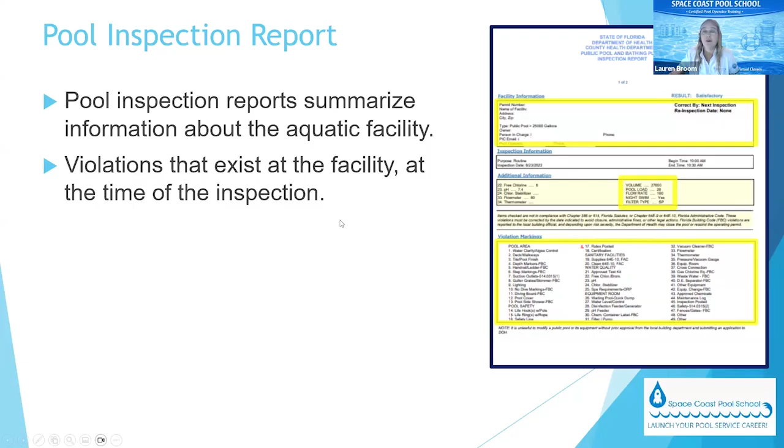So violations that exist at the facility at the time of the inspection are written down here in the violation marking section. And the local health agency will not advise on correction of violations. It is the responsibility of the facility's pool operator. And communication with the local health agency is a very important step in the correction of your violations.

So this is the very top. We blew it up for you, the top of the inspection report that you get from your health inspector here in Florida. And as we indicated, on the top is where you're going to have your permit number, the name of the facility, and the address, and all the identifying information. In the blue box, it gives you the type of facility, gives you the owner, person in charge, their email and contact info, and your pool operator.

And then the green box is the inspection information, gives you the purpose, inspection date, and it gives you the begin and end time of the inspection when the inspector was there. Down below that, you have the additional information box in that yellow box. This is where the inspector is going to put the things that they checked on their inspection. So they should have a test kit and they're testing your free chlorine, your pH, your chlorine stabilizer, also known as cyanuric acid.

They're looking at your flow meter for the flow rate in the equipment area and writing that down in gallons per minute. And if it's a heated facility, they should be checking the thermometer. There has to be an inline thermometer in the return line, and they're writing that temperature there. And then again, the blue box is the same information that's on your pool permit as well.

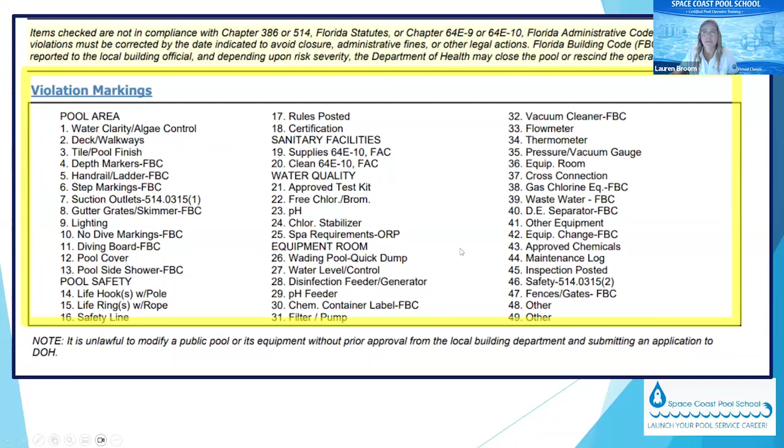Okay. General comments could be if you had a perfect satisfactory inspection, they have to write something. They're going to write something like no violations noted during this inspection. That's their legal way of saying while they were there, they found no violations. Doesn't mean there weren't any before or after they left. Doesn't mean that they didn't miss anything either, because they're human beings. People miss things sometimes, and they might see it on the next inspection. So be aware that can happen.

An inspector can close a spa and still keep your pool open. They're written on different inspection reports. So one could be satisfactory and the other one could be closed. They're separate entities from each other. So different permit numbers, different who it's issued to, could be different ownership on there. The owner is indicated on there.

Violations number 2 and 3 are physical hazards that are under the Department of Health code. These could be things like an unsafe wet deck, sharp edges or broken tile in the pool, or a hazardous pool finish. This is up on a gutter edge where the tile kind of broke and there are some sharp edges on it. So somebody that puts their hand there could cut their hand on that. That can be a closure item. Okay.

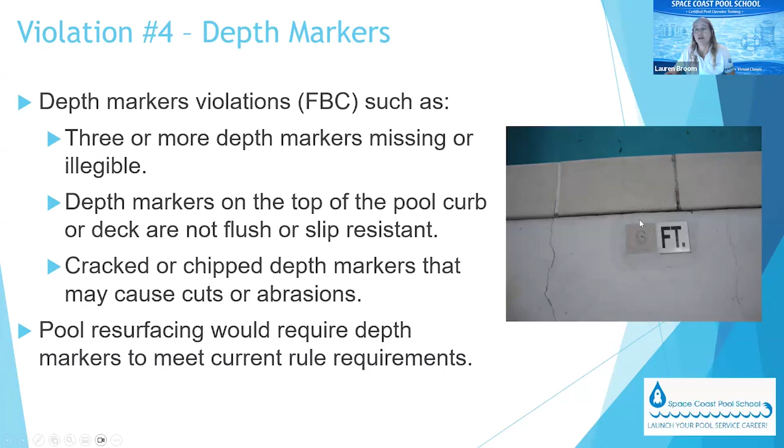So this is an example of a depth marker that basically is not legible anymore. You can kind of tell it's a 6, but it needs to be clear. It looks like the tile might have come off or something like that. So pay attention to the inner tile edge where the depth markers are and on the curb.

Violation number 5, handrail and ladder. These are Florida Building Code violations. Examples for closure would be missing, inoperative, or loose ladders that are a safety hazard, and same with the handrail. Missing bumper guards on the pool ladder feet. Missing escutcheon plates that cause exposed bolts up on the deck or with the handrail in the bottom step. Missing slip-resistant step treads on your pool ladder, missing steps on the pool ladder, or a pool ladder that is not flush with the pool wall. And again, ladders and handrails have to be addressed with pool resurfacing.

All right, so this is a handrail. It's the same pool that had the surface issue. This pool had another problem. That handrail could be lifted right out of the pool deck, guys. So that's an issue. That would be a closure item. Big safety issue.

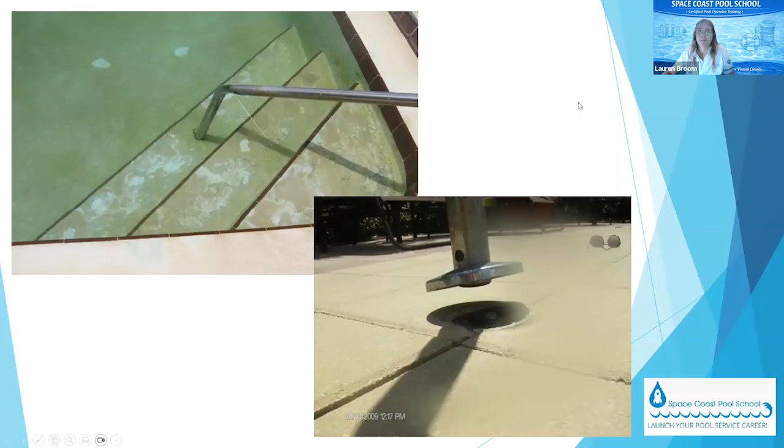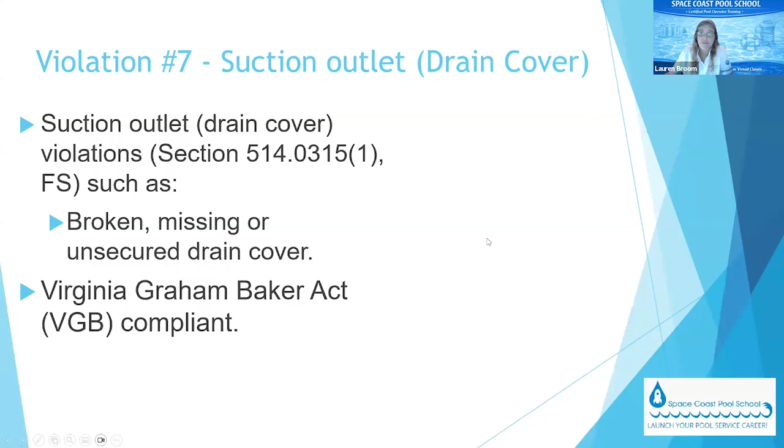Violation number 8 is your gutter grates and skimmer violations. So any injury hazard on any exposed broken gutter grate, or a missing skimmer cover on the pool deck. So that's up on the pool deck itself. You're missing the skimmer cover. If somebody's not paying attention where they're walking, they could break their ankle, anything like that. And if you're missing your skimmer equalizer line cover or plug.

Oh, this is always a hot topic one. Violation number 9, lighting. So first, let's look at different lighting violations. Loose underwater lights from the pool wall, that's a closure. Any electrical code violations with lighting. And then if you have pool hours on your pool rule sign that state night swimming hours, but the pool has not been approved for night swimming with a lighting certification.

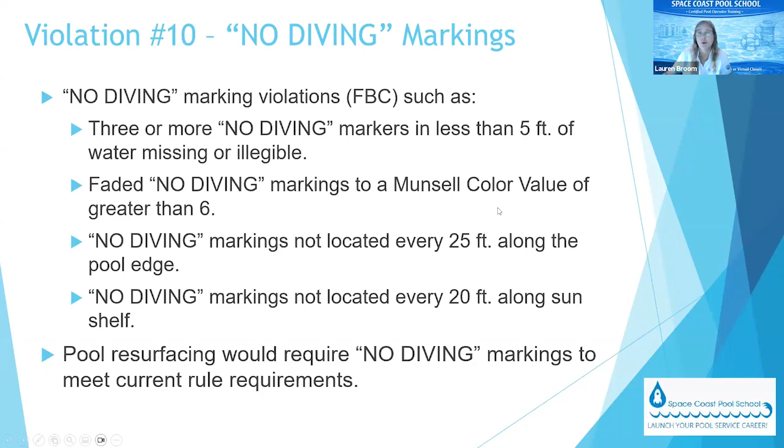Violation number 11, we don't see this one written up a lot because we don't have a lot of public pools that are approved with diving boards. But diving board violations are FBC, Florida Building Code, and examples would be if the rail is missing for a board 1 meter or higher over the deck, if the diving board is broken, or the diving board is not secured to the deck properly. So it's some common sense stuff. If it's loose, broken, damaged, anything like that, it's going to probably be a closure item for that pool.

Pool covers, violation number 12 for closure. Pool cover violations are under the Department of Health Code. If the pool cover is in use when the pool area is open, it has to be able to support a live adult person. So those floating bubble covers are not meant for that. Somebody falls into it, it can wrap up around them. They can't get out of it. They're going to drown, especially kids too.

So if you have the pool cover on, you should have your pool locked up because you don't want anybody even in the deck area. All right. So it's those floating covers that we're worried about. And then if you have it on a roll and you've taken it off, you've got to back it off 4 feet from the pool water edge before you open the pool.

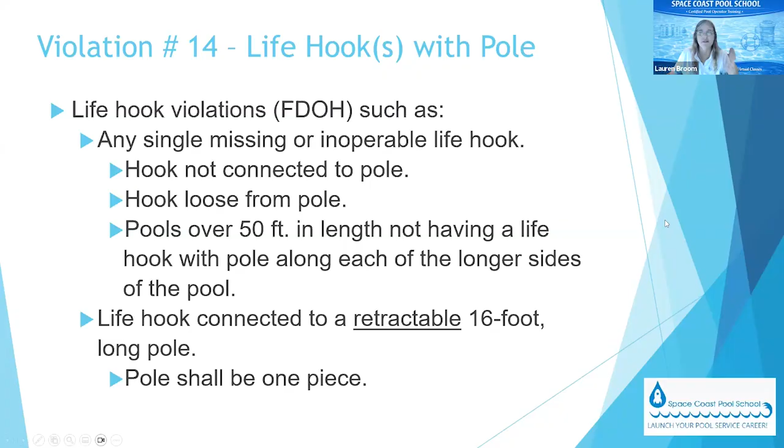And the life hook cannot be connected to a retractable pole; it needs a 16-foot long pole. The pole has to be one single piece. So it can't be retractable like some of those are when you have your skimmers and stuff like that. All right. One single 16-foot long pole. Always check the bolts and wing nuts too. Make sure that they're on this side of the pole and the wing nuts are on the other side, and that they're both there and they're not rusting through and loose and stuff like that.

Make sure it's on that 16-foot single length pole and that the life hook is conspicuous as well and that it's not being blocked by tables and chairs and stuff like that. You can get written up for that as well.

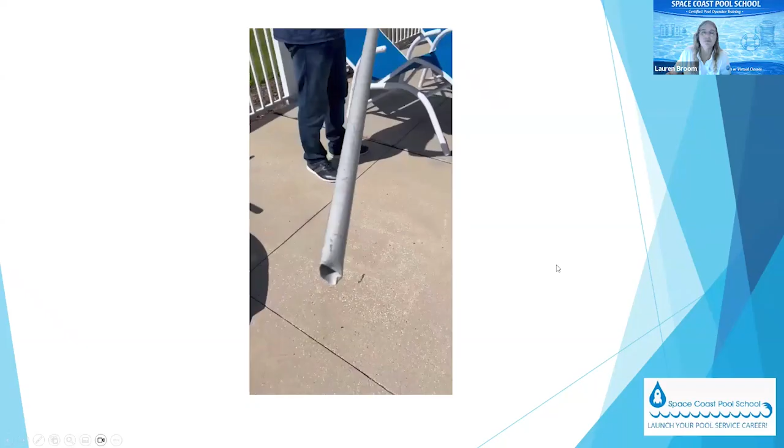So I think the maintenance guys at the hotel where we were teaching the class went ahead and tried to make their own 16-foot long pole. Can't do that. All right.

What about violation number 15, life ring or rings with the rope? This is a Department of Health violation. And so any single missing or inoperable life ring with rope would close the pool. And again, pools 50 feet or greater in length have to have 2 life rings along with 2 life hooks on both of the longer sides of the pool. Otherwise, it can be closed.

If you have frayed or dry rotted rope on the life ring, they could close it. If the rope's not tied to the life ring, if the life ring does not have sufficient length of rope to reach all parts of the pool, they could close it. If the life ring is not 18-inch in diameter, and you can't use decorative life rings either.

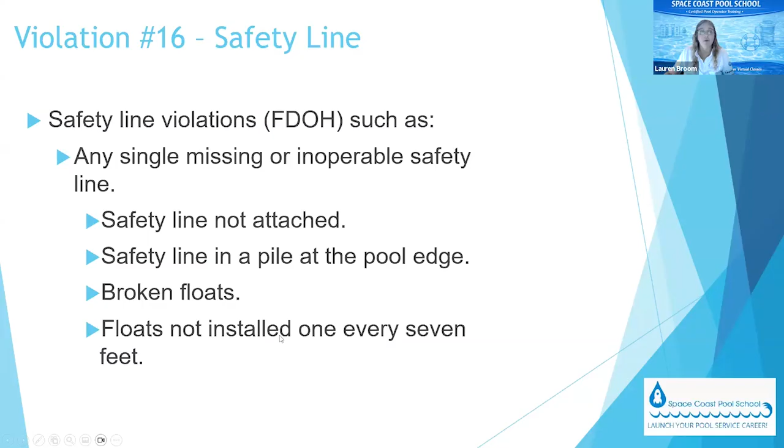Sanitary facilities. What do we mean by that? That's bathrooms, right? Sanitary facilities, which are our bathrooms, are Department of Health violations. So if we had poop on the floor, toilets aren't working, poolside bathrooms are not accessible, meaning they're locked. A lot of properties will do that. They will lock them on the weekends. Well, they can't do that. They have to be open.

Get a key fob or a key or something that the people living in the community are going to have. You can lock it, but then they have a key that they bring with them to access the bathrooms. Make sure the health inspector knows that that's what you're doing. They can put that in their general comments so that they know they probably need to ask you for a key to access the bathrooms to inspect them, because it is part of their inspection.

Hurricane damage. If a hurricane comes through and damages, say, your clubhouse, we had this happen in 2004 when I worked with the Department of Health, and the clubhouses were down and they had no poolside bathrooms, but the pool was fine. People really wanted to go swimming in their properties, especially the 55 plus manufactured home communities. So we let them get portable toilets under a different administrative code under the health department.

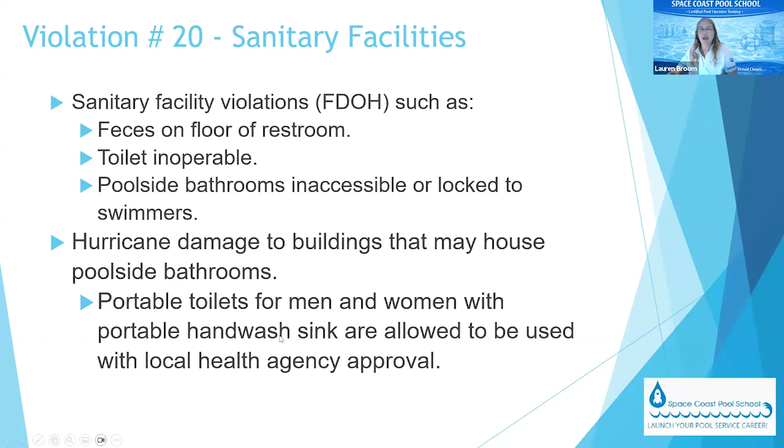And I think it was like 6 months they're allowed to have it, as long as they pump them out and they don't become a sanitary nuisance. They have to have 2 though, one for men, one for women. And you have to have a portable hand wash sink that's separate from the portable toilets. And you have to keep it stocked with the single paper towels, and water and the whole 9 yards. All right.

So bathrooms can be inspected by the health department. They can be right off the pool deck, or they could be part of the clubhouse, but they're still going to be within the distance required by the health code. And they're looking at making sure you have hand wash supplies, so soap, disposable paper towels, or a hand dryer, someplace to put trash in properly.

Some of the newer bathrooms have to have floor drains and diaper changing stations. And they're making sure that you have the number of toilets required and all that good stuff based on when the pool was built. Older pools are going to have fewer toilets. They've increased the toilet count in the code as we got into more modern times. So they're going to be checking all that stuff in the bathroom as well. Some people are surprised that they're checking the poolside bathrooms, but it is part of the inspection. Okay.

Chlorine levels in the pool. This is definitely for disinfection and is going to close the pool. So I want to go over this really quick. Swimming pools have to be maintained between 1 and 10. If you have a splash pad or anything like that, it's 2 to 10. If you have a spa or hot tub on your property, it's not 2 to 10 anymore, guys. It's 2 to 5. They dropped that upper level on spas from 10 to 5. That's a really hard level for chlorine to maintain. So I'd be interested in knowing how many spas across the state have gotten closed, not staying between 2 and 5, since they changed that in 2023.

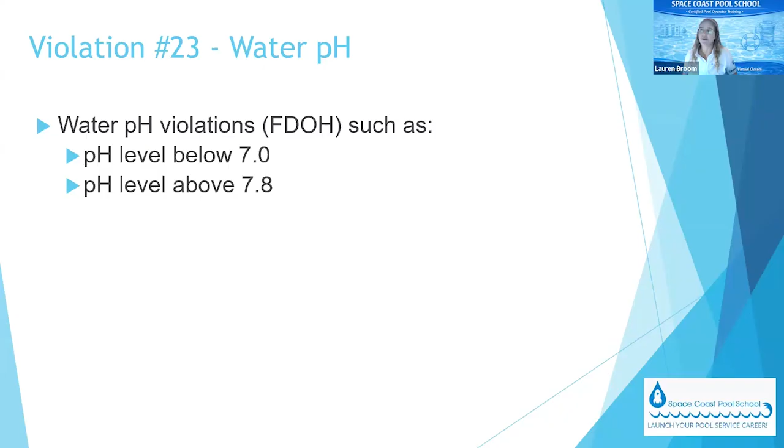And then we get into pH level. They did update and change the pH level in 2023. Before June 20th, I think, of 2023, it was 7.2 to 7.8. They lowered it to 7. So now the closure happens when it's below 7 or above 7.8. So as long as it's between 7 and 7.8, you're good.

And then we get into your disinfection equipment. You have to have an automatic chlorinator or disinfection feeder working on the pool, hot tub or whatever facility you have. You cannot have it open if you do not have a chlorine feeder or some type of disinfection feeding equipment that is actually feeding the chlorine or disinfectant for you. Hand feeding chemicals into a pool in lieu of using an automatic chlorinator will close your pool. Hand feeding shall only be done for supplemental adjustments, like when we have a full day of rain or something like that.

Salt chlorine generators not being utilized as a primary means of disinfection. They have to have a secondary disinfection system in operation. So a salt chlorine generator is normally not going to be approved by the Department of Health as a standalone means of disinfection. It makes chlorine, but they're not really technologically able to meet the health department output rates right now. Okay. And if the injection point for the chlorinator is incorrectly located into the collector tank, it has to be inputted into the return line of the pool, not into the collector tank. If you have no automatic disinfection device present, the pool can be closed.

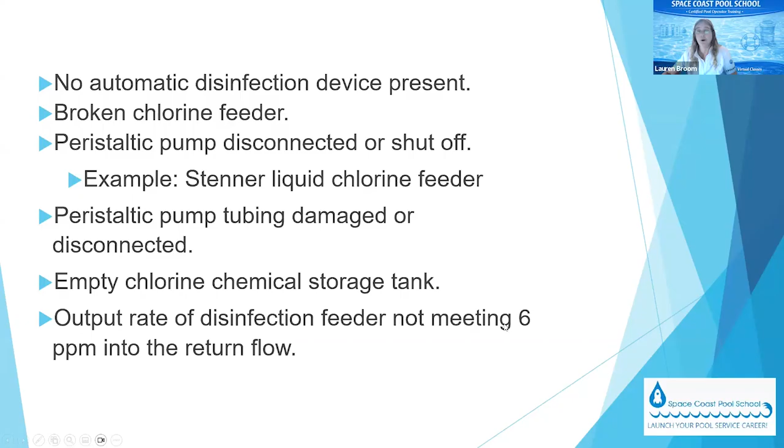If you have a broken chlorine feeder, if it's disconnected or just turned off, there's switches on these peristaltic pumps, the Stenner feeders. If you just turn it off, then that's a closure item if it's a disinfection feeder. If the peristaltic pump tubing is damaged or disconnected, or you have an empty chlorine chemical storage tank, then you're feeding air, you're feeding no chlorine at all. Or if the output rate of the disinfection feeder is not meeting the 6 parts per million into the return flow, which is the output rate that is in our code.

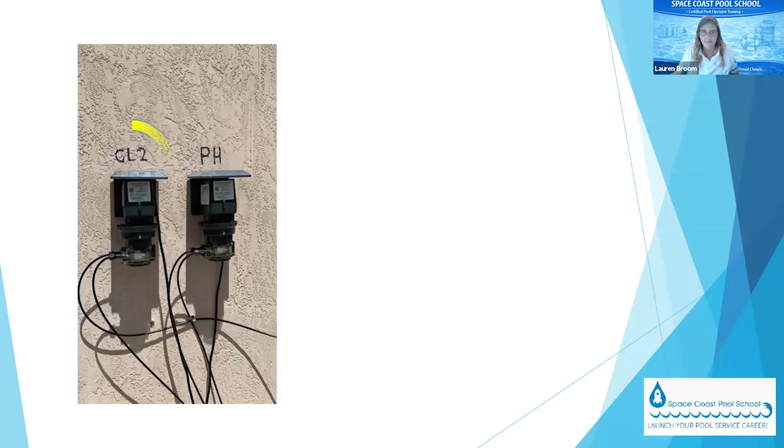But right now, if that chlorine feeder wasn't working for any reason, the inspector can close the pool. If this chlorine tank was empty, they could close the pool. If there was a split line on the tubes connected between the tank and the feeder, they could close the pool because it's not going to be feeding anything if there's a split line. Plus, now you've got chemical hazards that can happen.

If the chlorine tank is not labeled properly as to it has chlorine in it, and even the acid tank, if it's not labeled properly, then that's a closure item. We'll be coming up on that one in a minute. Again, the tubes, if they're damaged or broken or anything, then it can be closed. Any reason that the automation system, which is an ORP controller, is turned off and it's required to be installed on that facility, then there's nothing controlling the feeder for you. Then that would be a closure item as well.

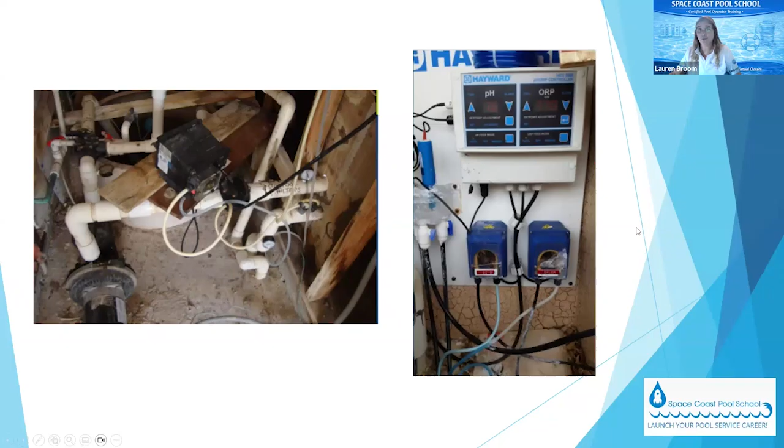This is a salt chlorine generator. They have a backup system that's required feeding chlorine as well that kicks in. They'll have an ORP system monitoring the ORP millivolt reading. And if that salt chlorine generator can't keep up to that millivolt reading, it will kick the liquid chlorine feeder on to make up the difference, to get up to that millivolt reading set point that you put into your automation ORP system. So those ORPs are really nice, but they don't work perfectly. So remember that they still have to be babysat and that you have to understand them.

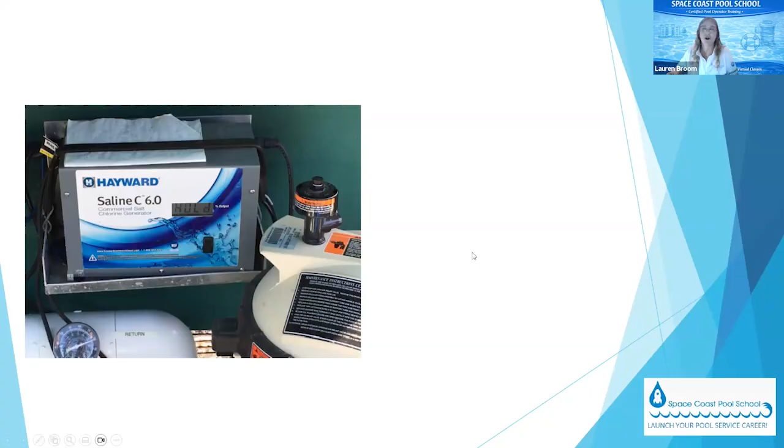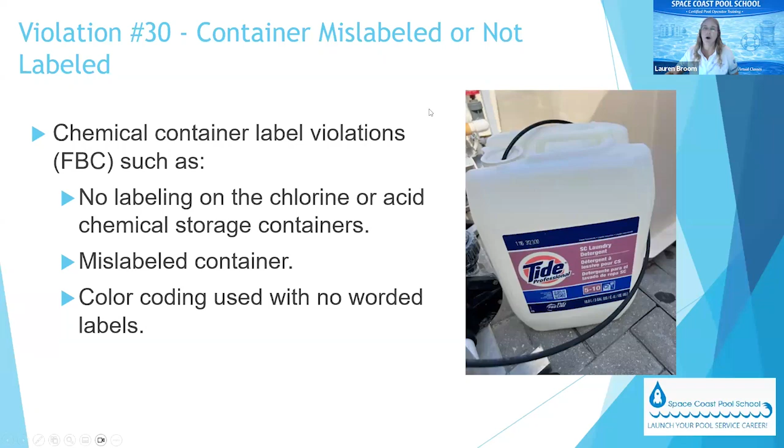So if you can't read it or it's mislabeled, this picture here, this is what they were trying to feed. They had two of these, one for chlorine, one for acid. This was at a hotel that I taught a CPO class at over in Tampa. The maintenance guys went to their laundry area and got two empty Tide laundry detergent bottles and said, oh, they're empty, so we'll just use one for acid and one for chlorine. And the problem is the storage capacity wasn't big enough, so they run out quickly. But it's also mislabeled because now it's labeled as laundry detergent, but it's not what is in those bottles. They had acid in one and chlorine in another. All right, so mislabeled bottles will lead to closure items as well.

So we got to get back to some basic chemical safety and different things like that. Even if it's not in the health code, there's a lot of stuff that are OSHA things that we should talk about that are not in the health code, so the health inspector can't enforce it, that I could go over with you guys. It would be a whole other class on chemical safety type items. That would be a really big deal. And it makes things safer at your property so that things don't happen like that.

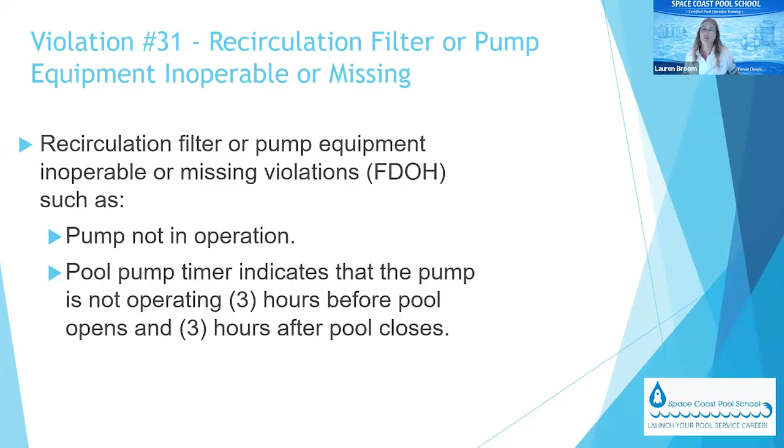And there were times I showed up for an inspection and the pump was off. So I had to close the pool while I was there.

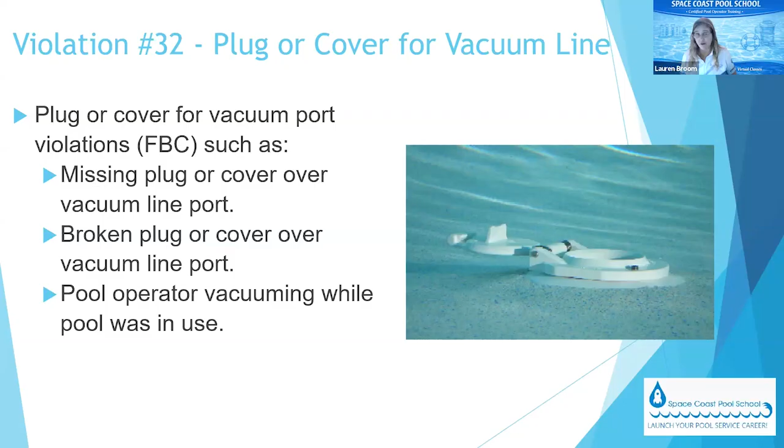Violation number 46 for closure under type A would be the entrapment safety feature, which would be the suction. If you have a direct suction pool, meaning there's no collector tank at all that the pump is pulling from. It's pulling directly on the main drain. And you should already know if you have a direct suction pool. These should have been identified way back in 2008, 2009 by the Department of Health. And that inspector should be aware of which ones have which devices, and how often they should be tested.

So you either have a safety vacuum release system, also known as an SVRS, or you have a suction limiting vent line, which is an SLVLS, controlling the suction pump. It's designed to basically cut the pump off or cavitate it if somebody gets entrapped on your main drain or other suction outlet. That is direct suction, because that pool was probably designed and built before 1977, or you have a spa that was built before 1992. Those are the dates where direct suction went away. By 1992, everything had to have a collector tank. All right. That was a drop dead date for spas.

If you're missing the entrapment safety feature, or you haven't done the required testing per manufacturer... Most of your SVRSs require monthly testing, and the suction limiting vent lines require annual testing by a licensed pool contractor, because it's actually in the Florida statute that you have to be licensed as a contractor in Florida to test those suction limiting vent lines.

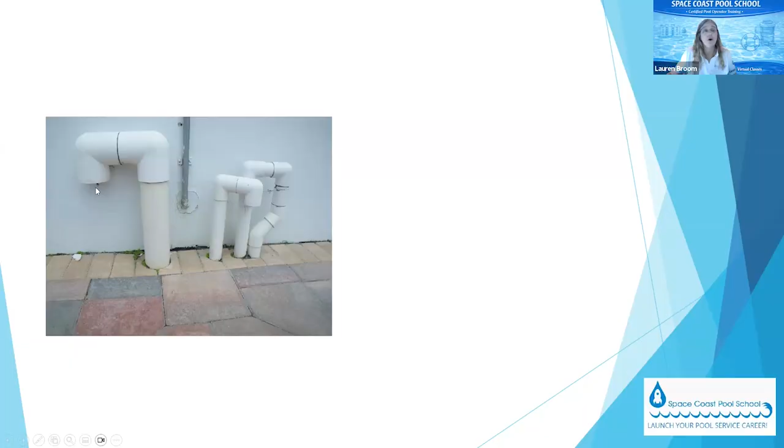So this pipe coming out of the ground right here is a suction limiting vent line. It usually has screening on the end of it so that an animal can't crawl inside of the pipe and die. So that sucks air back to the pump. And this is a VACalert, an example of an SVRS, safety vacuum release system.

And so the suction limiting vent line on the left has to be tested annually by a licensed contractor. The one on the right would be tested monthly, because VACalert, as a manufacturer, says it's required to be tested monthly by a qualified person.

And I have safety checklists for these types of devices. If you do have them, I can send you anything you need. I have the forms and checklists and different things like that. When you get my email at the end of the presentation, you'll be able to email me directly and I can send you anything you would probably ask for. And if I don't have it, I can get it. Public records requests are a great thing.

Violation number 37 or number 48, this is bacterial or chemical contamination and fecal accidents. So if we have backflow that occurs from your wastewater back into the pool, fecal accidents in the pool, animal contamination in the pool, or non-potable water gets into the pool water from flooding or from sprinkler systems.

Non-potable water means it's not fully treated water. It's kind of treated, but not. I forget what they call it, but it's not potable. They usually have signs on the lawn saying it's not potable water. So it's usually irrigation water. If it can overspray into the pool, onto the deck or anything like that, then the pool should be closed during those times. So a fecal accident would definitely also fall into closure, okay? And they have to follow the CDC guidelines.

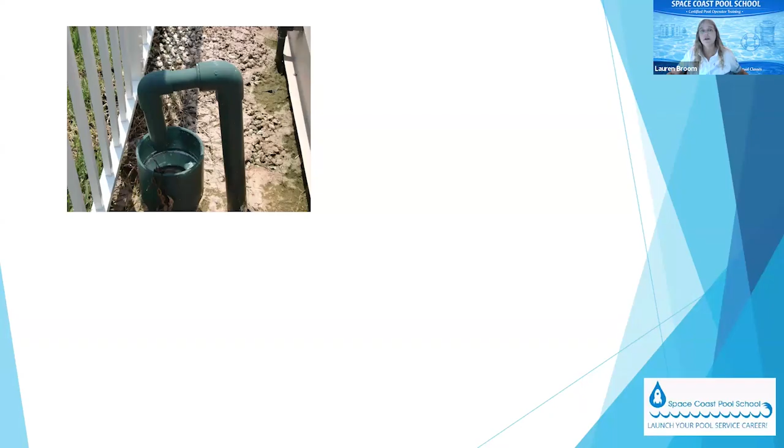This is a wastewater line air gap that you see when they backwash their filters and stuff like that. You've got to have that physical air gap between the rim and that pipe so that there's no direct connection, okay? This one is too close to the rim, so it's not meeting the air gap distance.

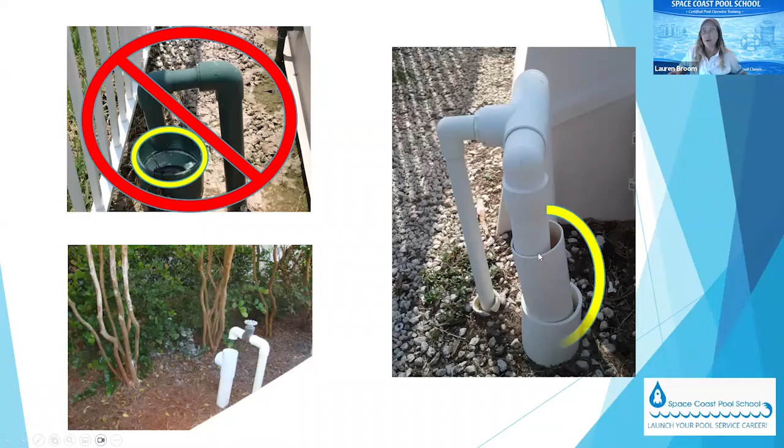This one is on the bottom left. You see that physical air gap there. And then the one on the right, they kind of modified it, and now that's a bad one, okay? Sometimes pool companies will modify things on you, and then it ends up being a violation. Just want you to be aware what these different violations are.

Violation number 42, equipment changes. Any unapproved equipment violations that could cause a type A violation, like disinfection modifications, filter system modifications, pump size, or going to a variable speed pump modification, or other pool equipment that has been modified that could cause a type A violation, could close your pool.

All changes have to be approved by your local building department and health department agency. Some modifications are required to be reviewed by the Department of Health engineer. And I'm going to give you some examples of equipment changes here. So say we currently have a trichlor dry chemical erosion feeder, and we want to change it to a liquid chlorine feeder.

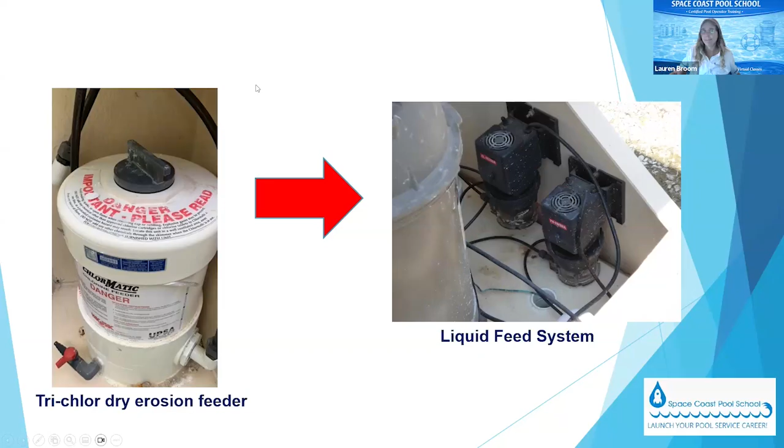That requires a form to be submitted. DH4159 has to be submitted for that equipment change. That is not a like for like change at all. Okay. What if we're going from a trichlor erosion feeder to a salt chlorine generator? Again, not a like for like change.

It will require building department and health department approval, and you submit a DH4159, because of the output rates for the chlorine input, and with the salt chlorine generator system, you're going to have a backup system with an ORP. So there's a lot of things that will get caught ahead of time on paper before it gets installed.

Don't let a contractor install something. Get it approved by the Department of Health and the building department on paper first. Once they okay it, then have them install it afterwards. Okay? That way you're not losing a bunch of money on something that they did wrong, because now it's going to be on you financially because you had it installed before it got approved.

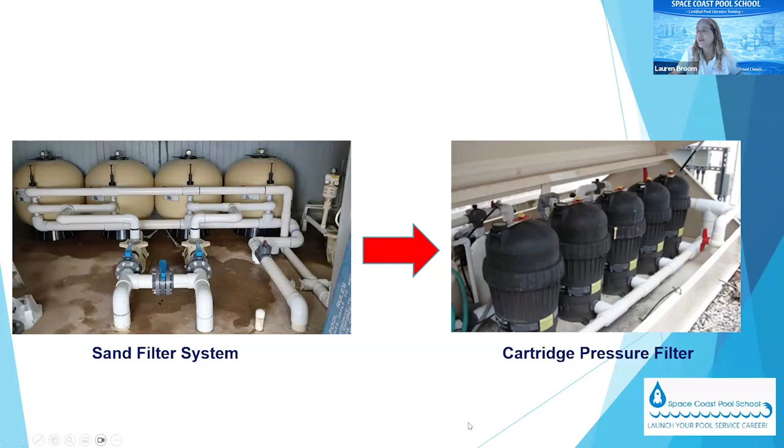Okay? If we go from a sand filter system to a cartridge filter system, pressure filter system, two different types of filter systems. How we calculate filter area for these two filter systems is completely different. It's not like for like at all. It's going to have to be submitted just like the other equipment changes, okay?

Violation number 47, fence or gate breach on a code mandated enclosure. So this is Florida Building Code again. So if we have a breach in the fence or gate, or a broken gate or latch, that pool can be closed. Those are things that can lead to little kids getting in there and drowning. So the gate should self-close on its own and then latch. If it doesn't, if it gets hung up or anything, then that's going to be an issue.

If there's a gap under the gate or the fence. If the fence or barrier does not meet the Consumer Product Safety Commission standards on height and latch height and the whole nine yards, okay? I have a document I could send you on the fencing requirements for the Consumer Product Safety Commission. And I can send you the Florida Building Code, just the section that applies to public pools. I could send you the 64E-9, the Florida statute, whatever you need that applies to public pools.

The more we know, the better we can pass our inspections. And I like pictures because they really help show us what some of these violations look like or what they lead to, okay? So any pools built before the May 2004 code revision are not required to provide fencing, by the way. But we highly recommend that you have fencing to help try to prevent drowning. But they cannot write you up on fencing if the pool was built before May 2004.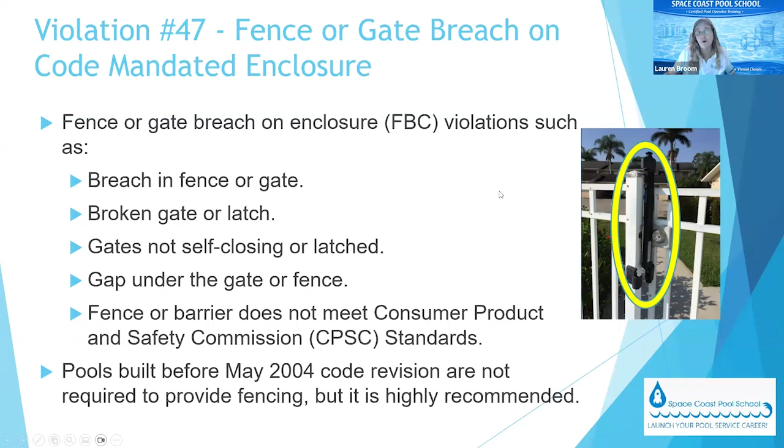That's an issue for drowning. So be aware. This is going to show you one at an apartment complex I did a class at. Brand new pool, it's 2 years old, and the gate got caught up on the sidewalk. They must have poured the sidewalk after the deck for the pool or something, and then they never pulled it all the way out to see what would happen.

Violation number 48 is your lovely other category. So there's a lot of things that can go here if there's not another category for it. So if the pool's open to people when there's any type A violation that's not mentioned anywhere else, they can put it under the other category. If the pool's open to people when the annual operating permit has been revoked, suspended, or denied, or it's expired, they can write it here.

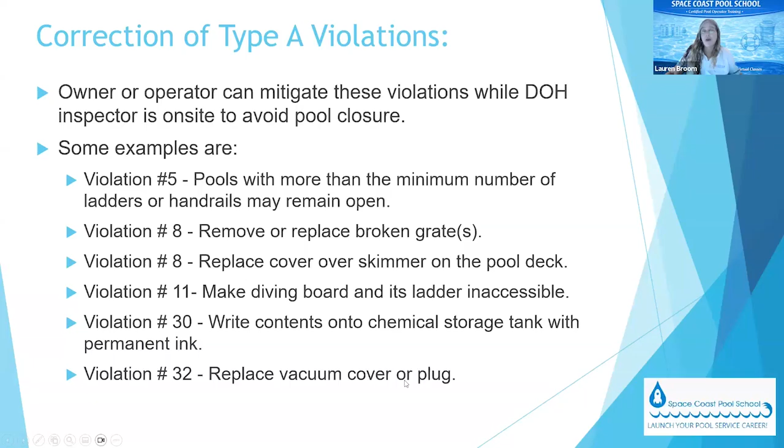Write the contents on your chemical storage tank with like a black permanent marker. If you're able to do that while the inspector's there, then it could lead to the pool not being closed. Or replace that vacuum line cover or plug, as I said. So those are type A's. Those close the pool immediately and are usually re-inspected by next day, unless there's some reason that you're not going to be able to get it corrected next day. Then they'll ask you when you think they can come back and do that reinspection, but it's an immediate closure.

Type B are things that are going to be an unsatisfactory inspection, and the violations have to be corrected within 7 days. So these are the next highest level of severity, but they're not a closure. Unsatisfactory, there's no sign up. People can still go swimming in the pool.

And a lot of the swimmers don't know that there's an unsatisfactory. The property managers do, the maintenance know, and maybe board members know, but not everybody in the community knows that there's an unsatisfactory, right? So these are kind of major violations, but not as bad as the type A's. And they're re-inspected within 7 days.

And this would be like under violation number 27, the water level and the control. So water level and control violations where the pool water level is lower than the level of the skimmer or the gutter system. This is because it doesn't allow proper skimming of the water surface. Or if that pool water level is higher than the level of the skimmer or gutter system, again, you're not going to get proper skimming of the water surface either, especially with gutters.

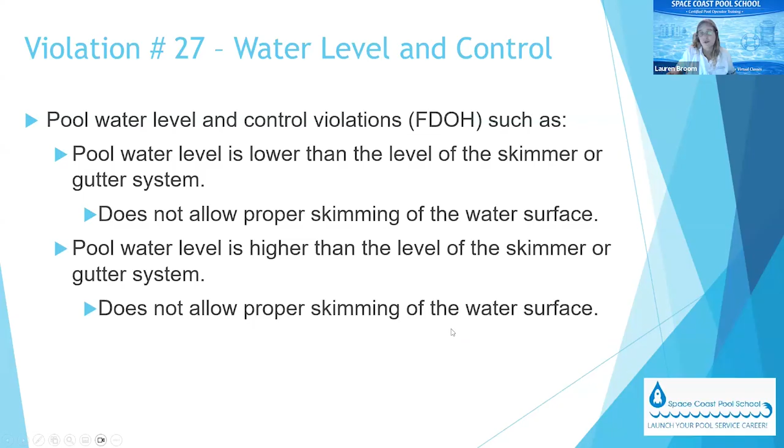Violation number 34 under type B is thermometer on the heated facility. So if you have a heater and you don't have a working inline thermometer, then they can do an unsat and reinspect in 7 days to check for it. So if it's missing, damaged, broken, anything like that. You can't use a floating thermometer in the pool.

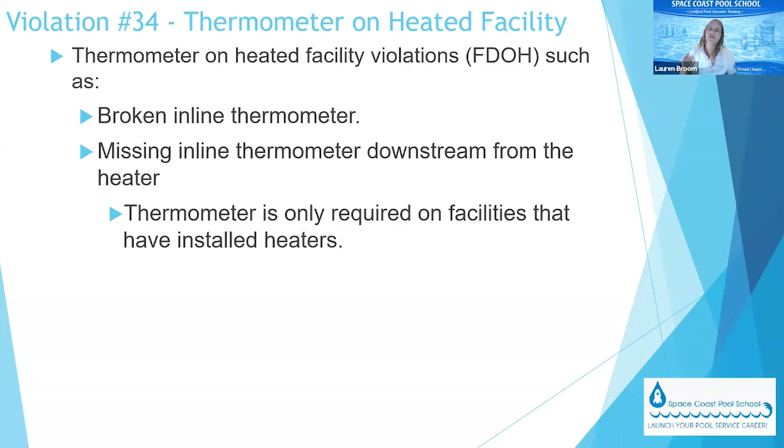Type C violations are also unsatisfactories, but you re-inspect in 30 days, not 7 days, which means they're not as bad as the other ones that are unsatisfactory, re-inspect in 7 days. So examples of type C are going to be like violation number 1 under pool appearance, if you have a minimal amount of debris, scum, or biological growth, which is minimal algae.

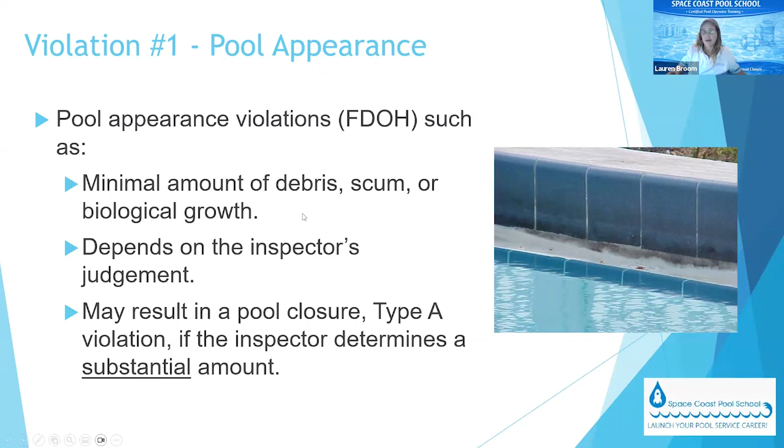And a lot of these under type C are going to depend on the inspector's judgment on what they think is a minimal amount. If they think it's substantial enough, they may turn it into a type A violation. Type C could then become a type A if it's bad enough and close the pool. So keep that in mind. This is a scum line. So if it's bad enough in their mind, it could be a type A, but if it's minor, they might make it a type C, unsat, re-inspect in 30 days.

Violation number 2 or 3 is deck, curb, or tile. And these are repair violations, right? So if we have minor damage to the pool deck, curb, or tile that would not result in injury, then it's a type C. It, again, depends on the inspector's judgment. If it's significant enough damage that it could result in injury, they might turn it into a type A. So it depends on the inspector's interpretation of whether they're going to make it a type A or a type C here.

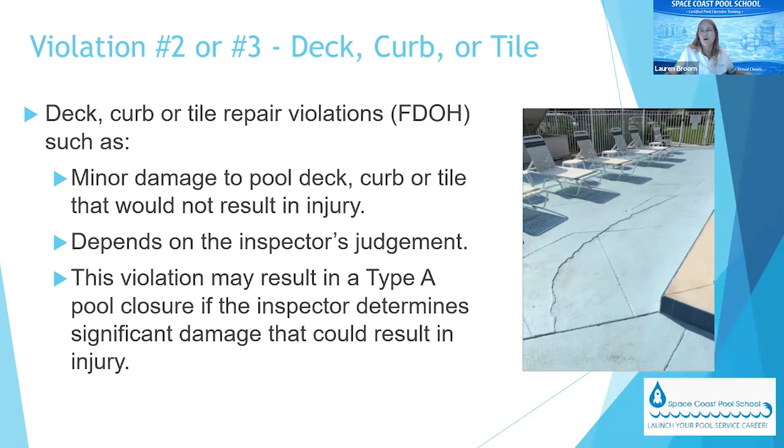Okay. Suction outlet covers. If the suction outlet drain cover exceeds the approved 1.5 feet per second flow, or the suction outlet drain cover is expired. If it's expired, it's an unsat, re-inspect in 30 days. And the reason for that is to give you enough time to get a contractor to order the drain cover and dive the pool and install it.

But it has to be installed by a Florida licensed pool contractor. And there's a form that has to be filed with the Department of Health as well. The DH4157 has to be submitted to the health department. Broken, damaged, or missing drain covers will result in a type A violation, though, that will close the pool. So it's just that if it exceeds the approved flow, or they didn't submit the form and the cover is expired, then that would be an unsat.

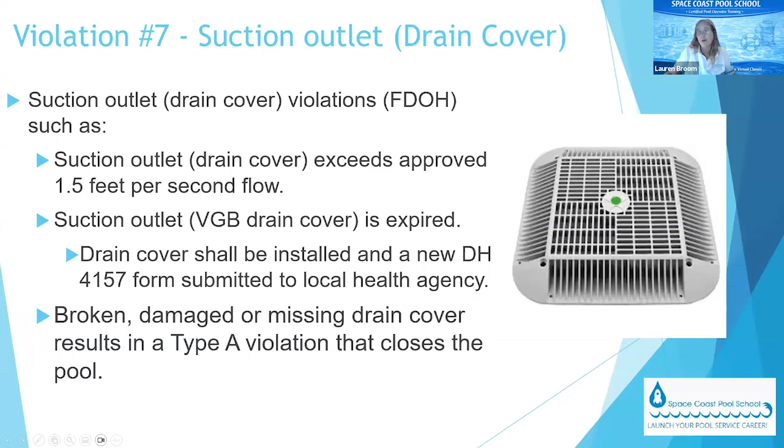Violations 14 and 15 with your life-saving equipment. So things like if the life hook is not visible or accessible from all areas of the pool deck, and the same thing with the life ring. So if they're not visible or accessible from all areas of the pool deck, then it's going to be an unsat, re-inspect in 30 days.

Violation number 17, pool and spa rules sign. If the sign's not visible or legible from the entire wet deck, if the no diving signage is not visible or legible, or the pool rule sign is non-compliant or missing. Non-compliant means that you're missing some of the required rules, and they did add stuff to it over the last 3 years. You have to have maximum depth now filled in with the blank for your pool in 2-inch lettering. They added about the commercial bottled water allowed within the pool wet deck area. That's all required now. There's certain things they added that are required.

Now you don't have to get a whole new sign made. You can just add to the current rule sign the new stuff. As long as it meets the sizing requirements and it's legible, you're good. And it's located where it's supposed to be. All right. They're not about you making the most expensive sign ever. You could get the cheap sign, order it online. As long as it's Florida compliant, you should be fine. I would always check with your health department, though, to make sure.

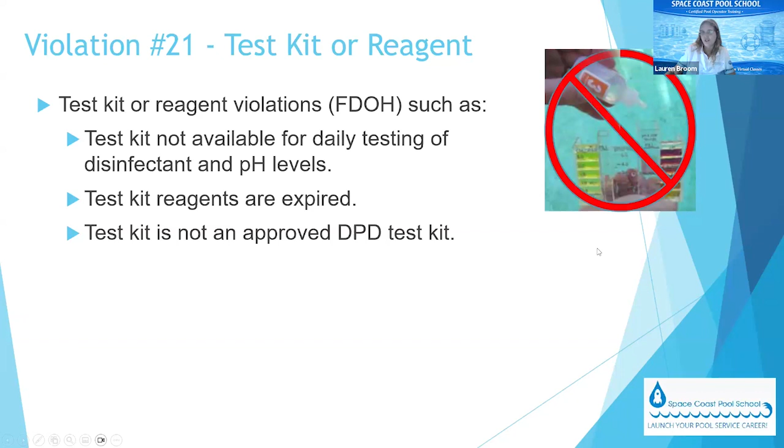If you're using a test kit that is not an approved DPD test kit, there are certain test kits that are not approved DPD test kits, then they can write that up and do an unsat. So the one up here is an orthotolidine test kit. It tests the chlorine in a yellow color. It's not approved. It's not a DPD test. Orthotolidine is a known carcinogen, so they do not want you using that. The Taylor test kits with the blue box are approved DPD tests, so you can use those.

If the test kit is missing the cyanuric acid test for the required weekly cyanuric acid testing, then that'll be an issue. That'll be an unsat. You have to have all the alkalinity and the calcium hardness tests as well. And if you have a salt chlorine generator, you have to have a salt chloride test as well on site to be able to test the salt chloride concentration. And so weekly testing of cyanuric acid is required for all facilities that are using stabilized chlorine or granular cyanuric acid in their facility.

Cyanuric acid: when we're testing the water for it, if the pool is 100 ppm or greater, then it's going to be an unsat, reinspect in 30 days. If it's a spa or hot tub, it's going to be 40 ppm or greater. That's going to result in an unsat inspection, reinspect in 30 days.

And remember, cyanuric acid levels can only really be lowered through dilution. So that's going to require partial draining of your pool or spa to add new water to dilute the cyanuric acid out. And the cyanuric acid is either coming from them using dichlor or trichlor at the facility or granular cyanuric acid separately on its own.

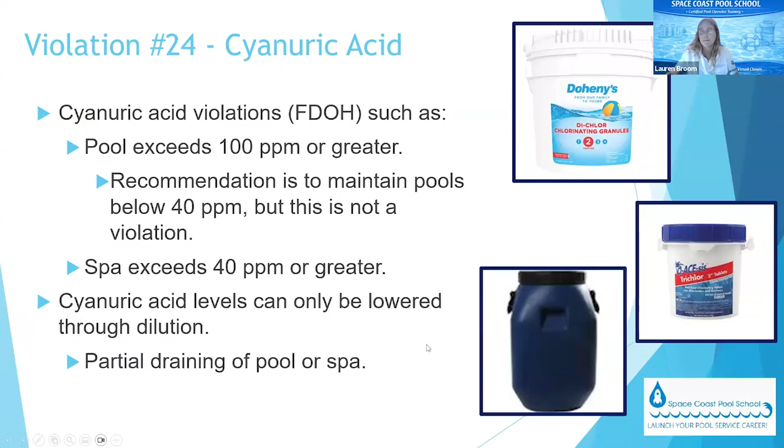Spa requirements and ORP. So if you have an inoperable, disconnected, or missing ORP controller, or the pH or ORP probes are disconnected or not calibrated, or there's visible alarm signals that have shut off your disinfection or pH feeding equipment, that would be an unsat, reinspect in 30 days.

If you have a missing or inoperable ORP controller on a spa that was built after May 25th, 2004, then because that's when spas were required to have ORP, you can't just take the ORP off. If you do, it'll be an unsat, reinspect in 30 days to get it reinstalled and working again.

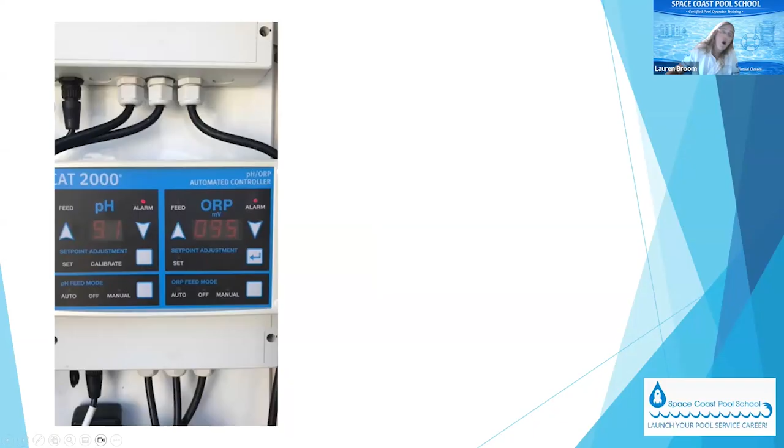ORP alarms that we're talking about are these alarms, they usually have red lights on them where it says alarm. It's usually high ORP alarm, low ORP alarm, high pH or low pH alarms. Be aware of your different alarms and look at your ORP controllers. Have the manuals and do the basic maintenance that you're required to do.

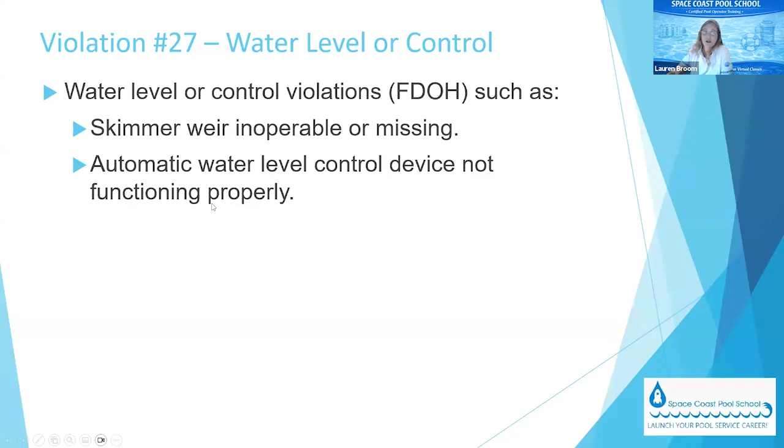The pH feeder. So chlorine feeders, automatic closure, reinspect next day. pH feeder is not. It's an unsat, reinspect in 30 days. So if the pH feeder is inoperable, disconnected, missing, if you're hand feeding your pH adjustment chemical, like your acid, in lieu of using your acid feeder, because hand feeding is only to be done for supplemental adjustments, or if that pH feeder is feeding into the pipe before the pool equipment, because it should be feeding into the return line after the equipment, then all these would be reasons for unsat, reinspect in 30 days.

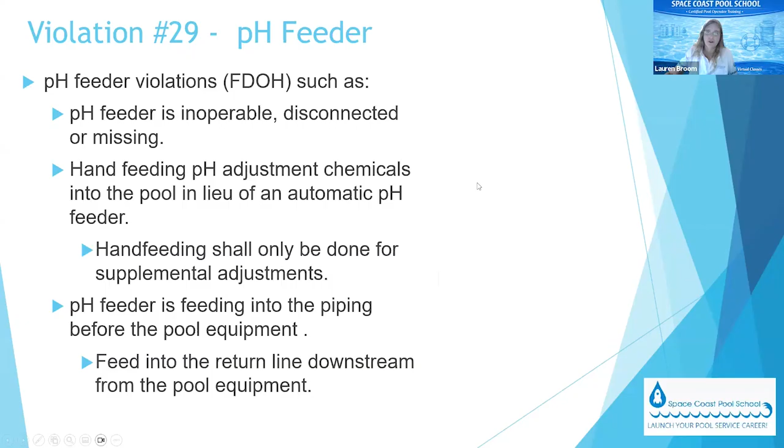So we're talking about the pH feeder, not the chlorine feeder on this. The chlorine feeder is a closure. pH feeder, unsat, 30 days, reinspection. And then you're feeding from that collector tank that has acid in it.

Now we get into violation 31 with the filter and pump violation. So this is where we get into the flow rate of the pool. If it's more or less than 20% of the design flow rate that's indicated on your annual operating permit or inspection report, then it's going to be an unsat, reinspect in 30 days.

So for example, if your inspection report or annual operating permit indicates that you have a design flow rate of 100 gallons per minute, the acceptable flow rate based on that 20% allowed on the flow meter would be between 80 and 120 gallons per minute. So anything below 80 or above 120 would be beyond the 20%, and that would result in an unsat and reinspect in 30 days on your inspection report.

So they're looking at the flow meter, and then they're looking at where that red or metal piece is hanging out most of the time, and then they're looking at the design flow rate. And if you're not within that 20%, then you're going to have an unsat inspection, okay? Stuck flow meters are also going to be an unsat, reinspect in 30 days, okay?

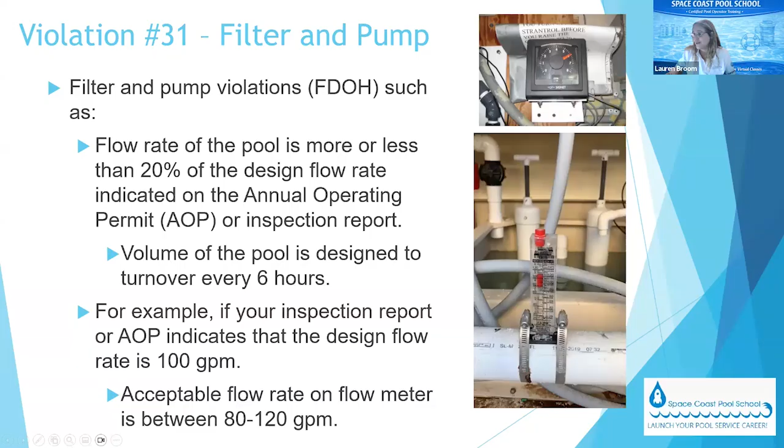Diatomaceous earth filter grid showing signs of wear and in need of replacement. Or you have DE powder bridging from one DE grid to another, or you have ripped or torn DE filter grids. They have cloth on them that the DE can adhere to, but sometimes they rip or tear. Those are going to be unsat inspections and reinspect in 30 days.

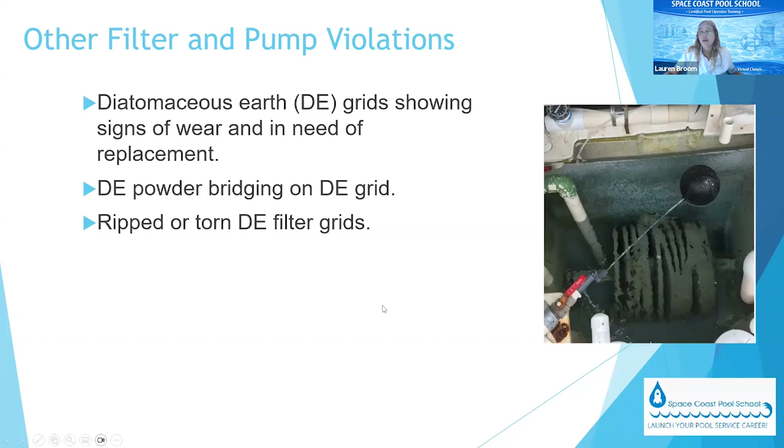So this is bridging of your DE powder. They've put too much DE, or they didn't leave it in pre-coat cycle long enough to get even distribution of the DE across the grids. So that's going to be an unsat, reinspect in 30 days.

This violation, though, could result in a type D violation if the inspector determines that it's minor damage to the filter grids that does not impact filtration. And type D violations are checked at next routine inspection. So it could be minor enough that they could make it a satisfactory check at next inspection. It's still a violation, okay? Depends on how bad it is.

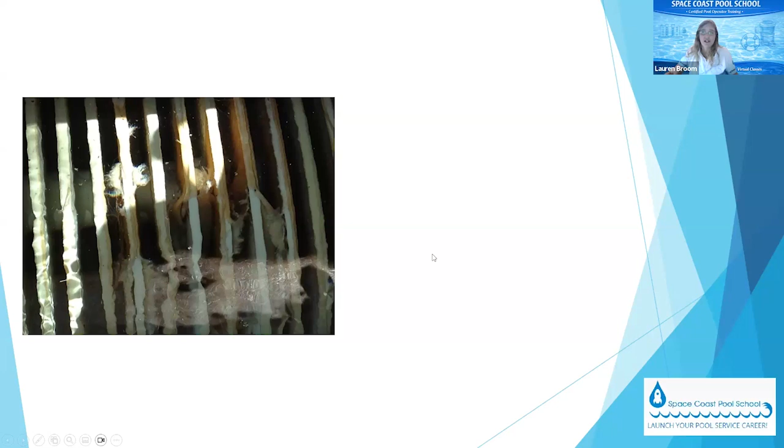Now, something like this, there's a lot of tears in the DE grids on many different DE grids here. This is going to be the unsat re-inspect in 30 days. But if it was just like one little tear in one little grid, they might do a satisfactory check at next inspection in 6 months. Just depends on the inspector.

Violation number 33, flow meter. If the flow meter is inoperable or missing or it's stuck, which is the most common violation written up, all right? And there are some flow meters that do not stick, by the way, like this one called the FlowVis. It does not get stuck. It's actually installed into the pipe itself, whereas the other flow meter I showed you before is bracketed onto the outside of the return line.

But stuck flow meter is very common. They get stuck a lot, and it's the most common violation. If the numbers on the flow meter can't be read anymore, so the flow meter is illegible, that's going to be an unsat re-inspect in 30 days. And if the flow meter is installed in the incorrect location, so if it's not installed on the return line like it's supposed to be, then that could be an issue as well. Or if you have an improperly sized flow meter, because they have to be sized properly for the pipe they're installed on.

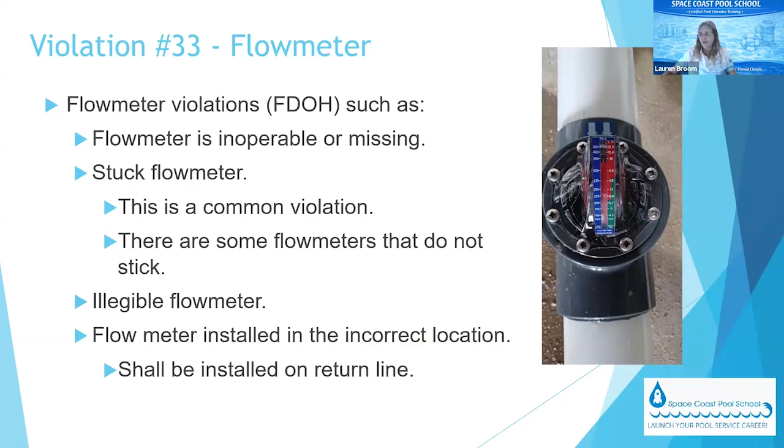Now we get into violation 35, pressure and vacuum gauges. If pressure and vacuum gauges are inoperable, broken, or missing, then that's going to be an unsat re-inspect in 30 days. So this is the one that reads inches of mercury and PSI. Vacuum gauge has to be installed before the pump, and the pressure gauge is installed after the pump.

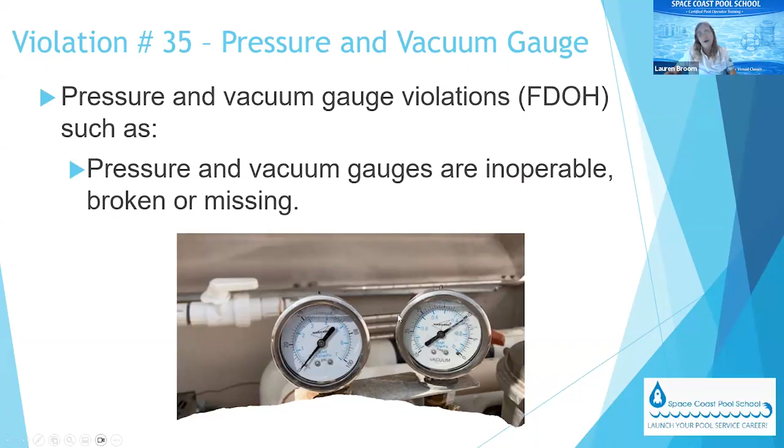The equipment room itself, the type of violations that are unsat re-inspect in 30 days. If chemicals are being stored separately from your chemical feeder in the pool equipment room, including DE powder, because chemicals like this are corrosive to your equipment and reactive to moisture in the equipment room, that would be an unsat re-inspect in 30 days.

And then we get into violation 46, which is with that specific Florida statute right there for the manufactured anti-entrapment safety features. So if you exceed the manufacturer's testing time frame, or it's not correctly installed, or the DH4157 verification form is not timely delivered to the local health agency, then that could lead to an unsat with a re-inspect in 30 days.

If you have no valid permit or never applied for a permit, so an annual operating permit that's not renewed by July 1st, or you have a construction approval given and then you didn't get your annual operating permit within the 30 days that you're required to, then it could lead to that unsat 30 days as well. The testing, as we said, for the safety vacuum release systems and suction limiting vent lines, you should keep a log like they are here.

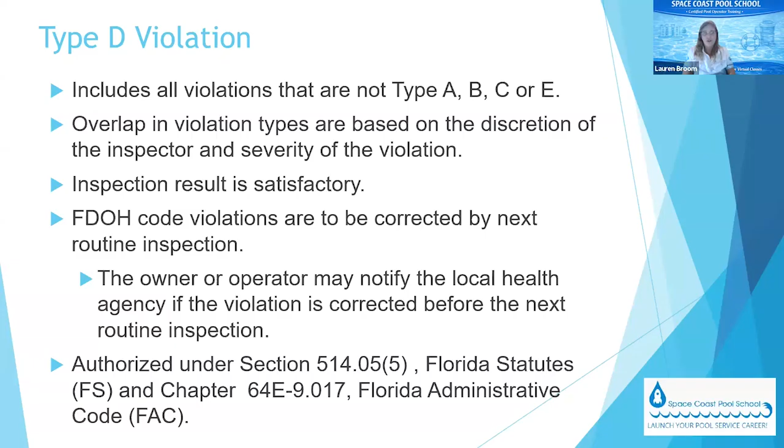Now we get into type D violations. And this includes all violations that are not type A, B, C, or E. There's overlap in the violation types, but they're based on the discretion of the inspector and the severity of the violation. The inspection result for type D is satisfactory, and these violations are going to be corrected by the next routine inspection. So type D, again, re-inspect next 6-month period, next routine inspection.

Under number 3, tile and pool finish, it would be things like if they saw a thick layer of deposited organic material on the tile line, or the pool finish is worn, or there's exposed aggregate, but not really, really bad. These are all minor, minor, minor. Or a broken water line tile that isn't going to injure somebody.

You get cracks in your water line tiles a lot, but as long as it's not going to cut somebody and it's just one tile, it could be satisfactory check at next inspection. So like one little area worn on the gutter there, but it's not going to cut anybody. It's not going to hurt anybody. They might give you time to get that fixed in that 6-month period with a type D violation.

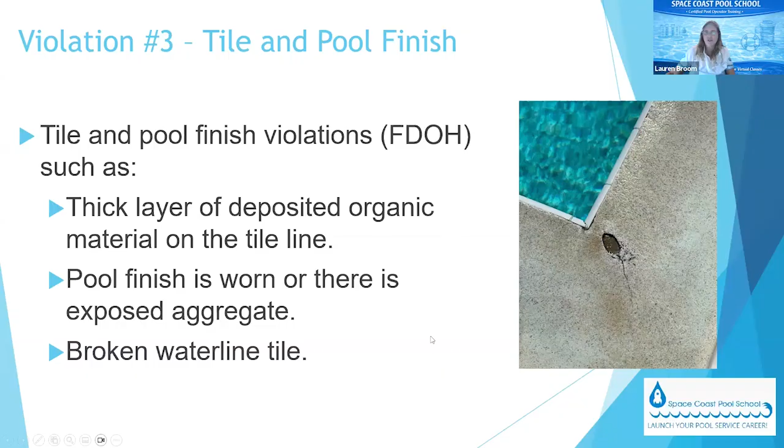Ooh, violation number 18, pool operator certification, which I teach these type of classes as well through my company.

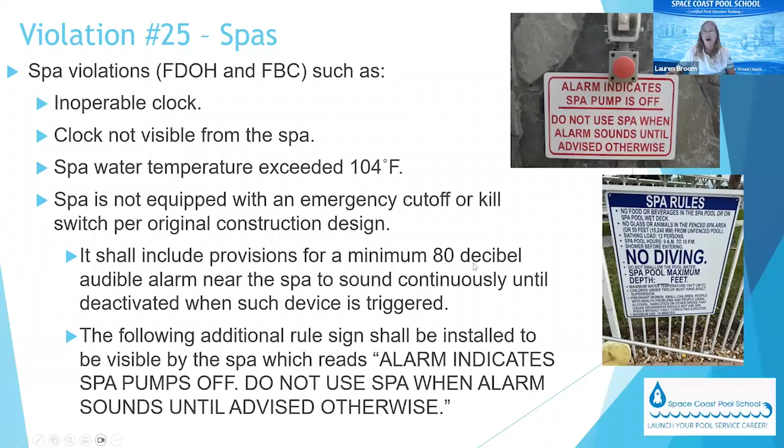And then you have specific signage that has to be with your emergency cutoff switch as well, that says alarm indicates spa pump is off. Do not use the spa when the alarm sounds until advised otherwise. Those are all satisfactory, check at next inspection.

So recommendations for spas. We recommend that you have a 15-minute timer installed on the spa therapy jet pump. At the time, it was not required, but I believe it is in code now in the Florida Building Code. They updated it in 2024 that you have to have a 15-minute timer now. It helps to remind people to not exceed the 15-minute recommended use time for health and safety reasons because of hyperthermia. So it's this type of 15-minute timer there.

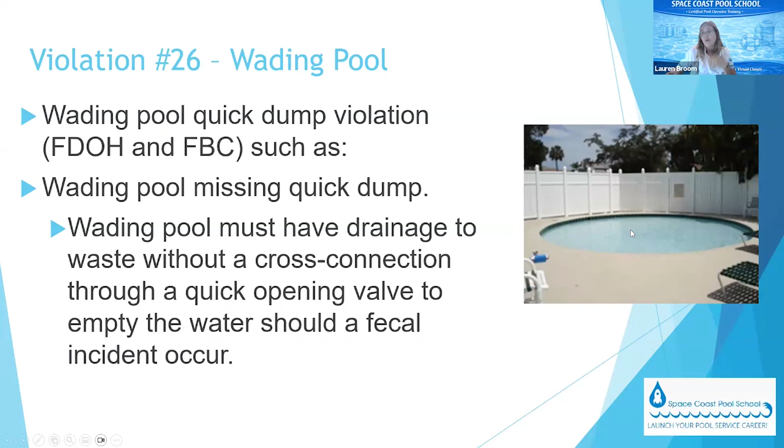Wading pools. If you have a wading pool, it has to have a quick dump. If it's missing the quick dump, then it's going to be an issue. Satisfactory, check at next inspection. So the wading pool must have drainage to waste without a cross connection through a quick opening valve to empty the water should a fecal accident occur. And that's because it's a pool that's 1 or 2 feet deep. Mainly little kids that are learning to swim are in there, and we have a lot more fecal accidents in those type of facilities.

Violation 28 for disinfection feeder, these would be examples of a satisfactory, check at next inspection. If we see the addition of erosion tablets to the skimmer basket or to the surge tank or collector tank, or we see a chlorine float in the pool, those are things that we're going to say satisfactory, check this violation at next inspection, and it better be gone by the time we come back. So no mesh bag in the collector tank with chlorine tabs, no chlorine tabs in the collector tank, no chlorine tabs in the skimmer basket, okay?

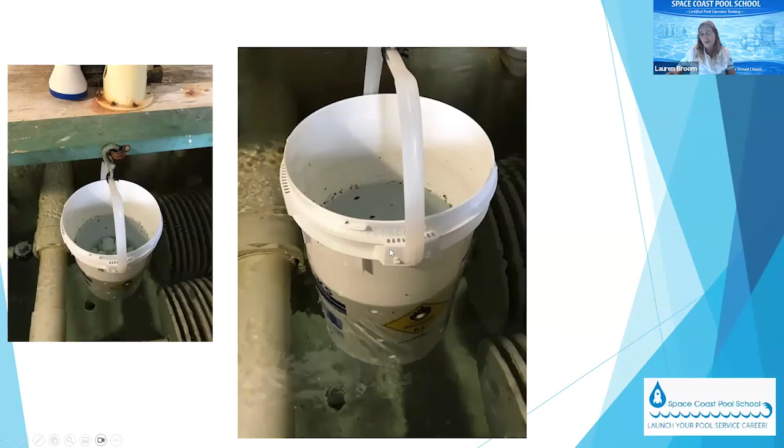You can't take your 5-gallon bucket and drill holes in it and hang it in the collector tank. That's going to damage their filter grids really quick because this type of chlorine is very acidic anyway. He had 2 erosion feeders that this maintenance guy just did not want to use. He took his 5-gallon bucket of tabs and drilled holes in it, hung it, and it's going to erode, but this is not where you want the chemicals to be. The chemicals need to be injected into the return line after the equipment so that you don't damage the equipment. It's going back to the pool and diluting out before it gets back to the equipment in high concentration.

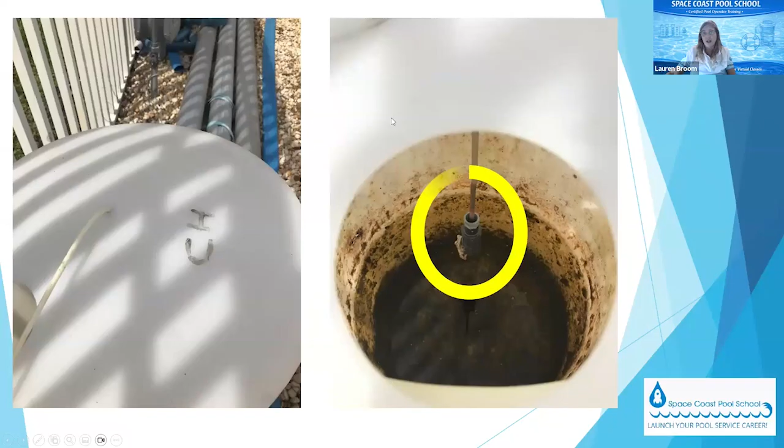Make sure that your chemical tank doesn't have a big opening in it when it's being stored outside so that rainwater gets into it and can dilute it down and everything else.

Violation number 31 when it comes to filter pumps. And the violations here, minor tears or bridging of your filter grids would be a satisfactory, check at next inspection. But again, it could turn into a type C if it's major enough damage to the filter grids that they think it impacts filtration. And remember, if it becomes a type C for the inspector, then that changes it. Now it's an unsat inspection and re-inspect in 30 days.

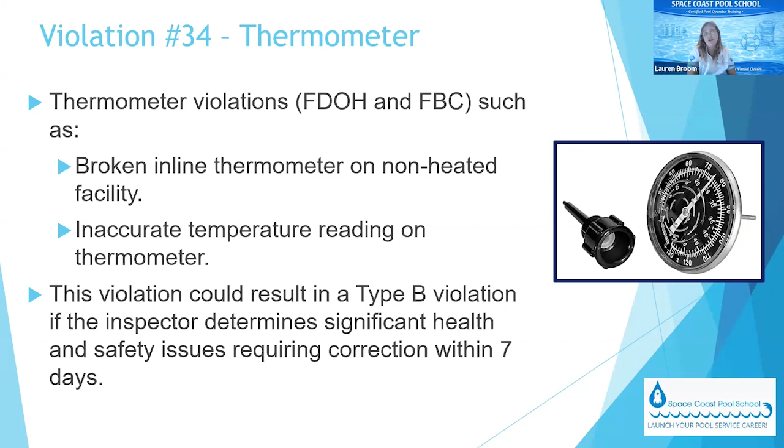Thermometer violations. So if it's a broken inline thermometer on a facility that does not have a heater, then it would be a satisfactory check at the next inspection. Or if it's an inaccurate reading on the thermometer, but at least you have the right thermometer and it's installed where it's at. Again, this violation could result in a type B violation if the inspector determines there's significant health and safety issues that would require correction within 7 days.

Pressure and vacuum gauges: a satisfactory check at next inspection would be if your DE vacuum filter has no DE on the grids, and this is indicated by your pressure and vacuum gauges. Or the vacuum gauge inches of mercury is higher than the baseline for when that vacuum filter is clean, then that could indicate that they're dirty to a certain point. Then they're going to do a satisfactory check at the next inspection. So they're looking at that inches of mercury. Where's the baseline? And if it's way higher than the baseline, then it's going to be indicating a violation at that point.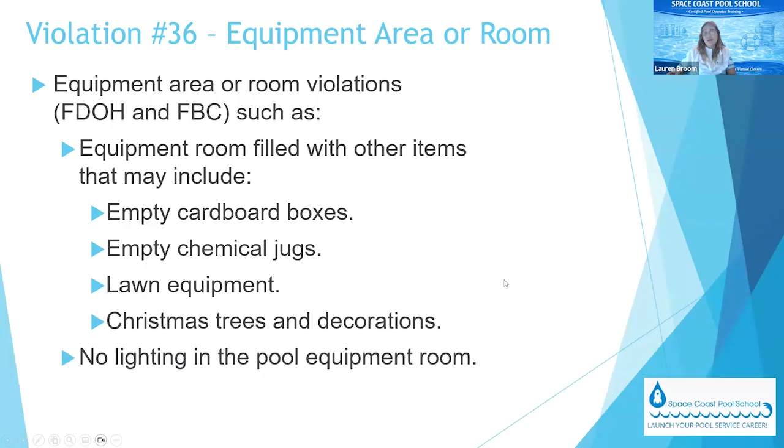Equipment areas or rooms. So equipment rooms filled with other items that could include empty cardboard boxes, empty chemical jugs, lawn equipment, Christmas tree and other decorations. Or if there's no proper lighting in the pool equipment room, that would be a satisfactory violation check at next inspection. Get rid of all that stuff, it's not a storage room for other things, okay? If there's no fencing or barrier to the equipment or heater, that would be a violation, but check at next inspection.

These are minor type D violations that are checked at next routine inspection. But again, if they think there's a severity here that could flip it to a type C, then it now requires correction within 30 days.

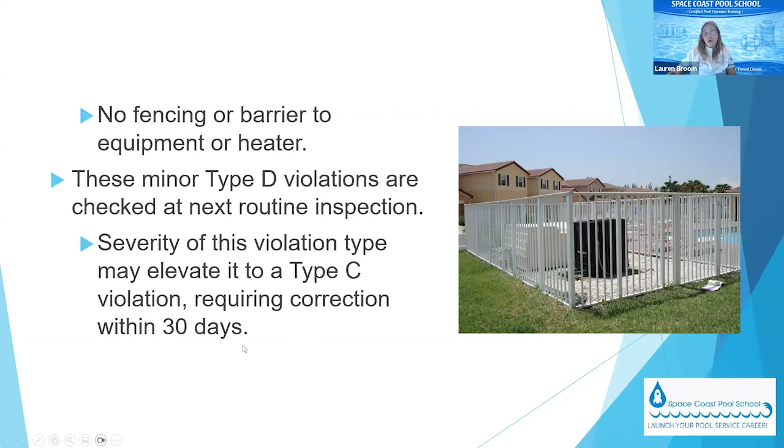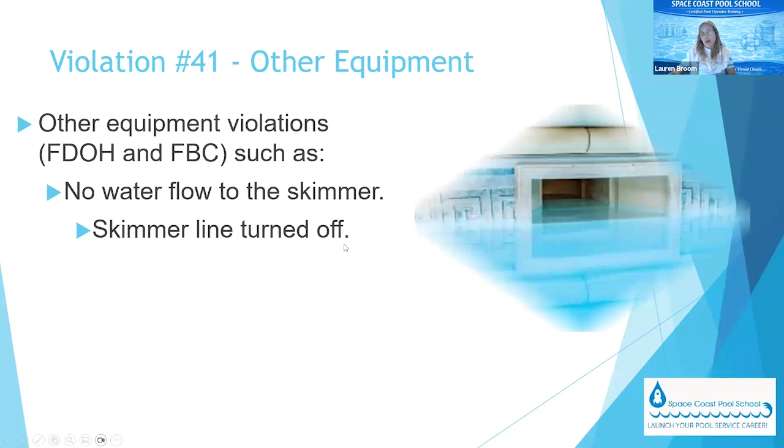And then your other equipment violations, like if we have no water flow to the skimmer where the skimmer line is turned off, and it's just one skimmer, but the other skimmers are working, then that probably would not be a big impact. So it'll end up being a satisfactory check at next inspection. Equipment changes, if they're unapproved equipment violations that are minor, that aren't a big deal compared to what we talked about already, then it would be a satisfactory check at next inspection.

But remember, all equipment changes need to be approved by the building department and the local health agency. And some modifications are required to be reviewed by an engineer as well. And this is the DH4159 form that has to be submitted to the Department of Health with equipment changes.

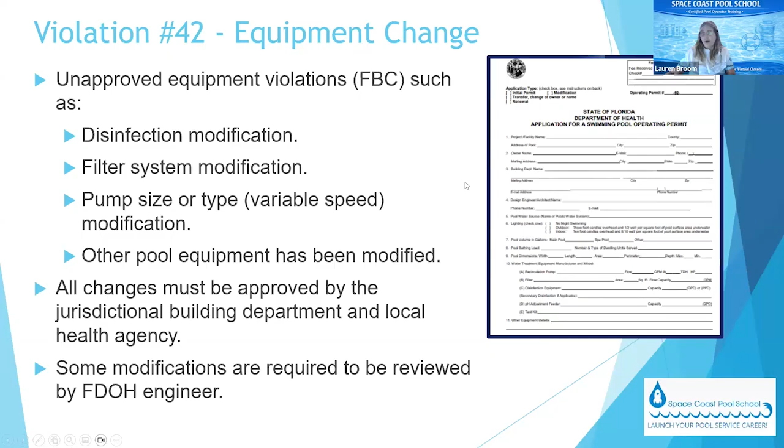So type D violations: if the violation does not create a type A violation, it's not capable of causing a serious public health or safety condition, and the violation does not reduce the allowable bathing load by a flow loss greater than or equal to 20% of your flow rate, then it'll be type D, okay?

Maintenance logs. I saw somebody mention violation number 44. So if you don't have a maintenance log available for review, it's damaged, incomplete, illegible, no record of your daily pH and chlorine readings as required, or you're missing your weekly cyanuric acid readings when you're using anything that would have cyanuric acid in it, either in the chlorine product or cyanuric acid on its own in the pool, then that would be a satisfactory check at the next routine inspection, guys.

Violation number 44. And this is an example of a chemical log for you here. They're missing their daily chlorine, they're not writing any pH readings at all, and no weekly cyanuric acid readings. So I want you to look at the chlorine readings as well.

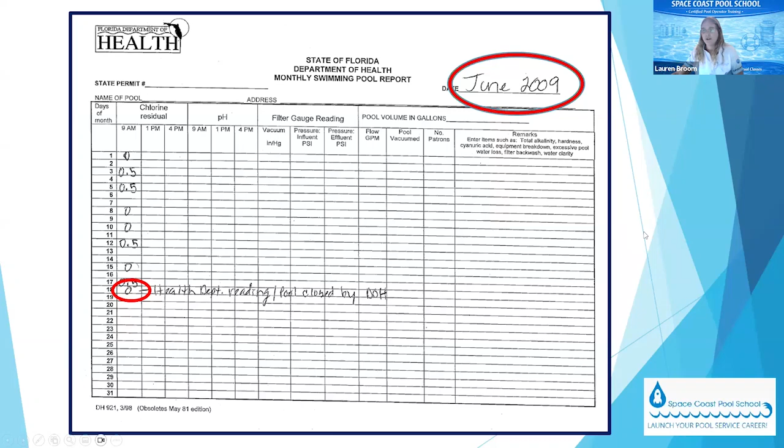So there's a document I can send you from Stenner that's the routine preventative maintenance that you should be doing on a regular basis to keep those feeders from breaking or becoming damaged. We want to be proactive with maintenance versus reactive. When you're reactive, it results in the closure of your facility, because when those feeder lines are clogged or they're split or damaged, you get no chlorine into the pool. And that's when the health department inspector always knows to show up just right.

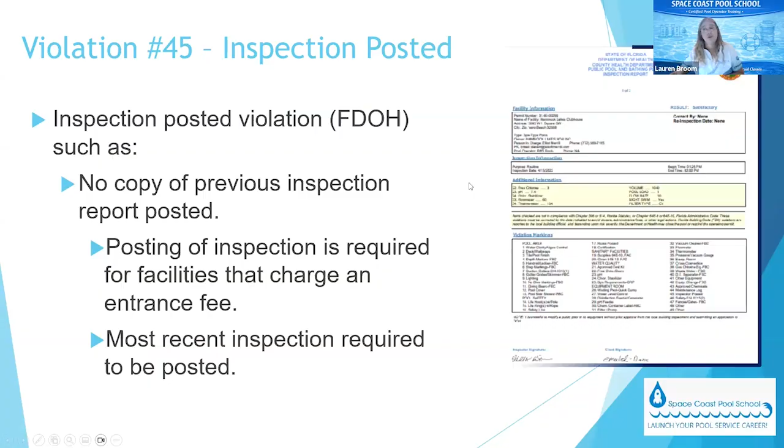Damaged chemical logs, usually because of weather or it's being stored over a chemical storage tank and the fumes damage it. It's like you have no log. And that log is there for legal defense as well, guys, if somebody thinks that they got sick. Inspection posted. So no copy of the previous inspection report posted. Now the posting of the inspection report is required for facilities that charge an entrance fee. So if you don't charge an entrance fee, you're not required to post your most recent inspection report. So most of you guys don't have to. Just keep it somewhere where you can find it.

But that's it. The other category for type D here is going to be like missing or broken covers on the floor or wall returns where the water comes back to the pool, missing or broken covers on jet therapy lines in spas and hot tubs, missing key or gate code for access to the pool equipment area. And usually that should result in an incomplete inspection because the inspector is not able to access the pool equipment and do their entire inspection anyway. So sometimes they might do an incomplete inspection.

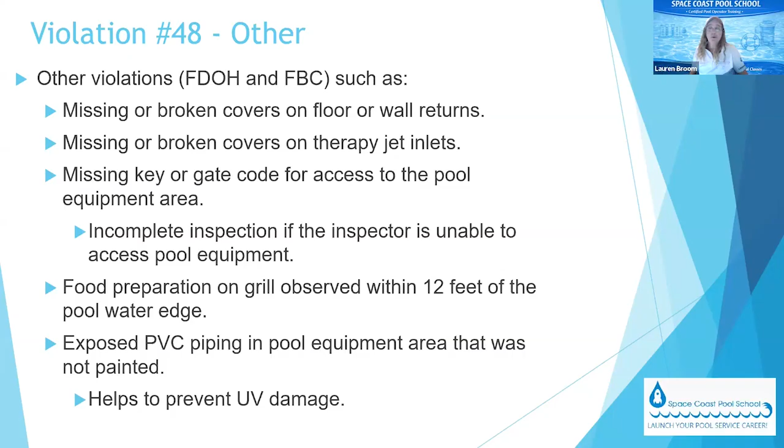Food preparation on a grill observed within 12 feet of the pool water edge would be put under this kind of category. So you can't have a grill like 10 feet from the pool water edge and be cooking there. There's a 12 feet or greater for food preparation areas. If you have exposed PVC piping in the pool equipment area that was not painted, painting them helps prevent UV damage to the pipes. So if it's got a cover, then it doesn't have to be painted. It's anything outside of that.

Type E violations, really quick. Our Florida building code violations have to be corrected by July 1st or 90 days from the inspection date, whichever comes first. The local health agency may close the facility if those violations are not corrected by that time period. So depth markers: if you have 3 or more, it closes the pool. 1 or 2 missing or illegible, or the use of unapproved markers, will result in a type E violation.

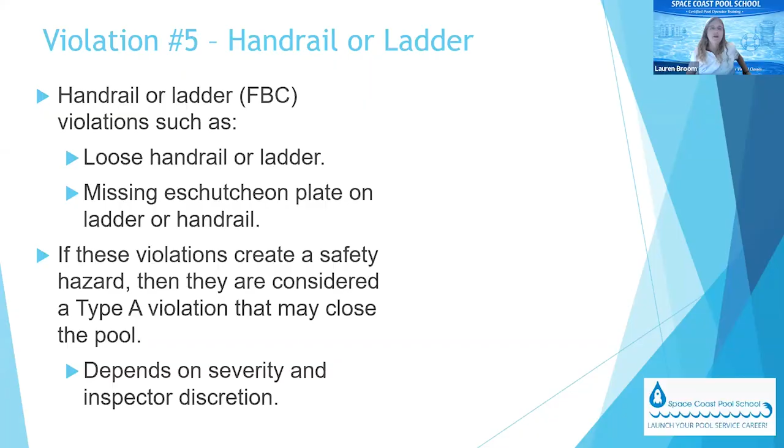Handrail or ladder, so if it's a minor loose handrail or ladder, missing an escutcheon plate on the ladder or handrail, then it would be an FBC type E violation. Step markings, remember it was 50% or more tread length. If it's over 10% but less than 50% of step edge markings missing or faded, then it'll result in a type E. Type E's don't close the pool.

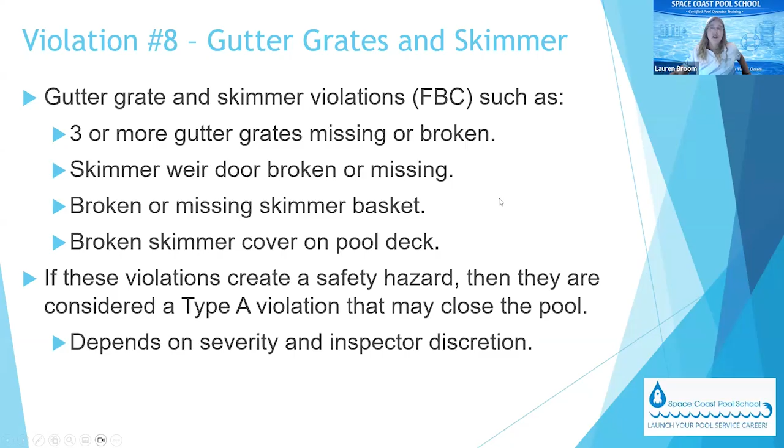They are marked as a check by 90 days or by the end of the permit year, by June 30th, whichever comes first. But if those type E violations aren't corrected by that time period, then your permit can be withheld from you, even if you pay for it, until you show that they're corrected. Gutter grates or skimmers. So 3 or more gutter grates missing or broken, skimmer weir door broken or missing skimmer basket, or broken skimmer cover, not missing, just broken skimmer cover on the pool deck, will result in a type E violation.

So make sure you don't have broken or damaged skimmer baskets or damaged or broken gutter grates, right? The no diving markings: any markers that are illegible or missing, or use of unapproved markers, would be a type E versus the type A that we talked about.

Deck shower. This is your poolside shower. If it's missing or inoperable, then it's going to be a type E violation. So make sure it works. Always check it to make sure it's working and it's not obscured by plants or anything else.

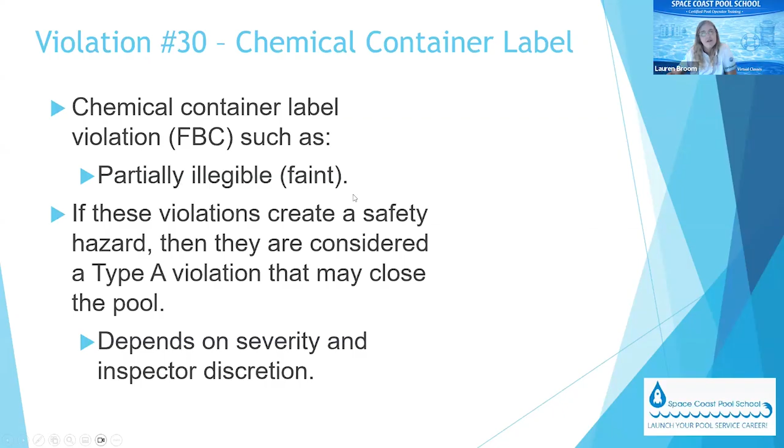Chemical container labels. If it's partially illegible, but it's still faint, you can kind of read it, then it would be a type E versus a type A. Type A, it's missing, or you just don't know what it is, okay? If it's partially illegible, it's faint, you can kind of tell it's chlorine, or you can kind of tell it's acid, but it's not clear, then it's a type E.

Wastewater disposal: if there's no air gap before the sewer line, then it's a type E violation. DE separation tank: this is a separate tank that has a bag in it for our DE filter systems that collect the DE. If your pool was built with it, it's required to be there, be used, and you can't take it out. If it's missing or inoperable, then it will be a type E violation. It will have to be corrected within 90 days or by the end of the permit year, whichever comes first.

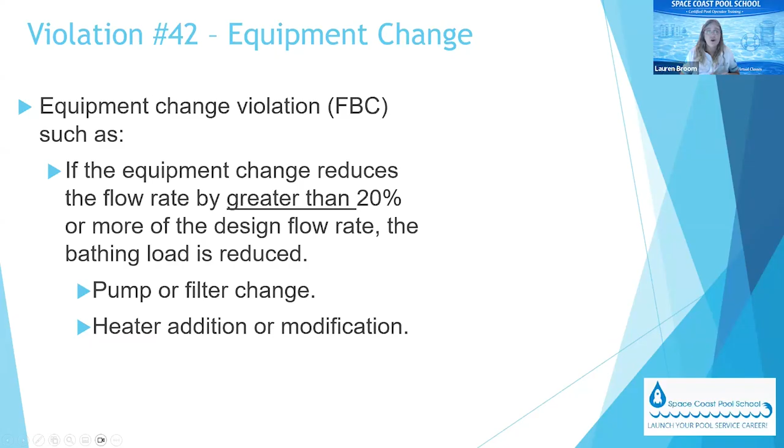And then certain equipment changes. If the equipment change reduces the flow rate by 20% or more of the design flow rate, and the bathing load is reduced, this could be due to a pump or filter change or a heater addition or modification. Then that would be a type E violation.

Fences and gates. If you have a damaged fence or gate, it's in need of some repair and it's not breached, code effective where we were required to have fences and gates in 2004, then if it's minor, it's going to be a type E. If it's a type A, it's a big gap that allows a kid to fit through. A 4-inch sphere or disc is what we usually use. If it's greater than 4 inches, then it's big enough for a child to fit through. So always check your barriers, your gates and your latches. If it's starting to rust, that might be a type E violation versus a type A.

So these are the most common violations that were written up in the permit year 2020 to 2021 when I did a public records request. Number 43, maintenance log, was written up the most. Violation number 33, flow meter, was next. So you can see as we go down, free chlorine levels in the top 10, pH levels in the top 10. So a lot of these things can close the pool as well.

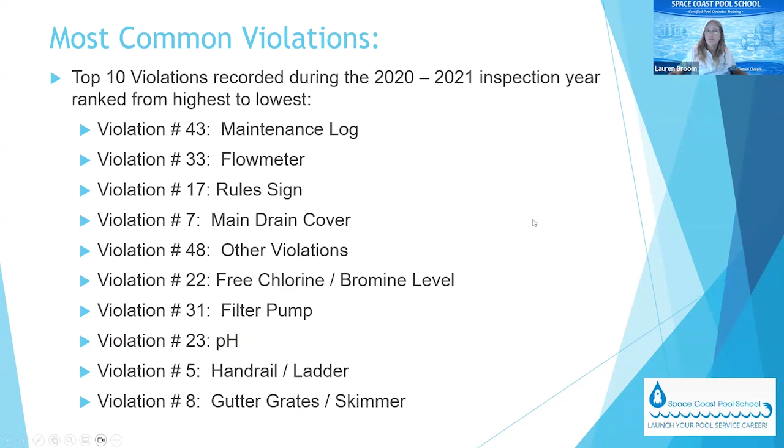People ask about emergency telephones on the pool deck. They are not required in the Florida Health Code on public pools. If you have one, make sure it works so that people don't assume it does, try to use it, and then can't. But you're not required to have one. They tried to require it, but it never went through the state legislature a couple times. So they're not required in code.

So let's handle questions now. I'm going to go through the Q&A here. What are the temperature requirements for heated pools? Is it seasonal? This is Natalie. She was the first question at 12 o'clock, as I'm going backwards in the Q&A here.

So the temperature requirements: if it's heated, it cannot exceed 104 degrees Fahrenheit. There are no minimum temperature requirements right now. They are going to be adding to the code, I don't know when. There's a whole new thing for those cold plunge pools. So there'll be minimum temperature requirements for those types of facilities, but that's not in code right now.

Carl Silverman said, what elements of the inspection rules are private residential communities exempted from? Are drinking fountains or emergency phones required at any private or public pool? So this is how Florida statute works. A private pool is defined in Florida statutes as any pool attached to 4 living units or less, if it's attached or parcels of land. So it could be a parcel that's not built out yet.